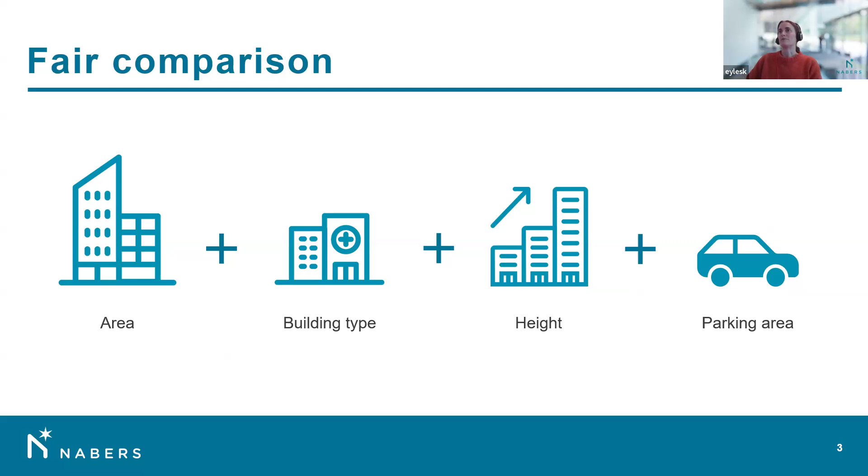We have an algorithm behind that takes into account things that affect whatever you're measuring. So if you're measuring energy use in a building, we would take into account things like area, building type, what is the use of that building, so that we can put everyone fairly on that scale, comparing apples to apples. So we certify buildings on a few things. Embodied carbon is, of course, what we are talking about today.

And to give you an idea of how widely spread NABERS is, these are just a few snippets from our website of active ratings. Operational energy ratings are mandated for buildings over 1,000 square metres when they're sold or leased, so we tend to have a lot of active ratings around Australia.

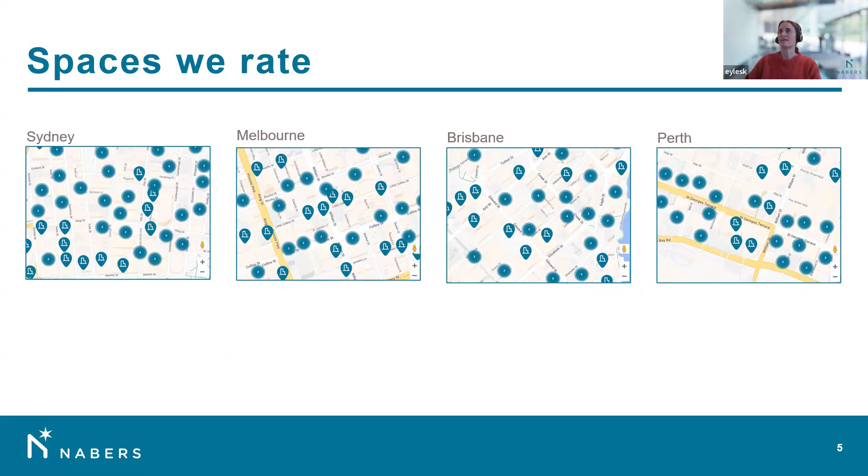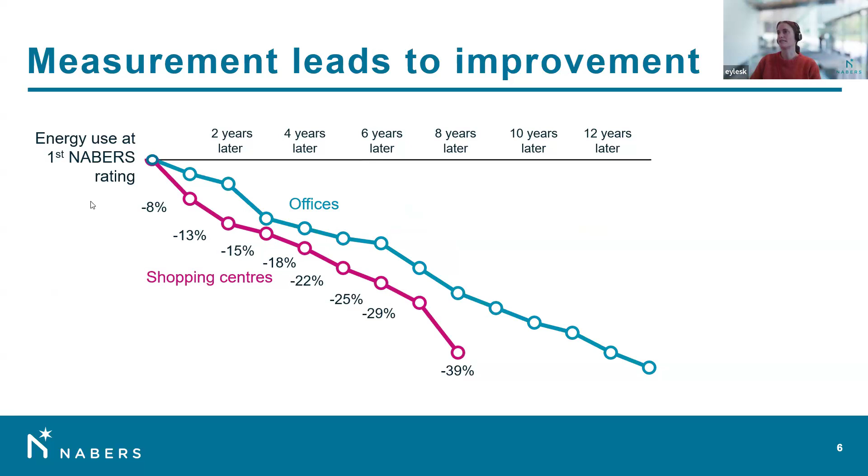And probably the main thing that we like to talk about with NABERS is, I'm sure you all know this, measurement leads to improvement. So for example, with office operational energy ratings, we've found that over 10 years, buildings are using close to 40% less energy, and shopping centres moved even faster. So hopefully with embodied carbon, we can do the same sort of thing.

In terms of the embodied carbon tool itself, we started working on that a few years ago in 2021. The first thing we did was spend a couple of years talking with pretty much everyone who's involved in creating buildings. So everyone from developers to architects and engineers, policymakers, and building product manufacturers. What we were doing was understanding, well, if we're going to create an embodied carbon measurement method, what do we need to take into account?

So for example, how much of the building are we measuring? Are we trying to measure everything down to the nuts and bolts, or are we focused on the materials that make a bigger impact, like your concrete and your steel, the structural elements? Are we trying to measure whole of life, right through to when the building is eventually demolished, or are we measuring upfront carbon just until people are starting to use the building?

What emission factors should we be using for materials? All these kinds of things we discussed with everyone to agree together as an industry what the right way to go was. So that's why it's been kind of a long road to get to this point. But the tool is out now, and essentially what the embodied carbon tool is, is these 5 things.

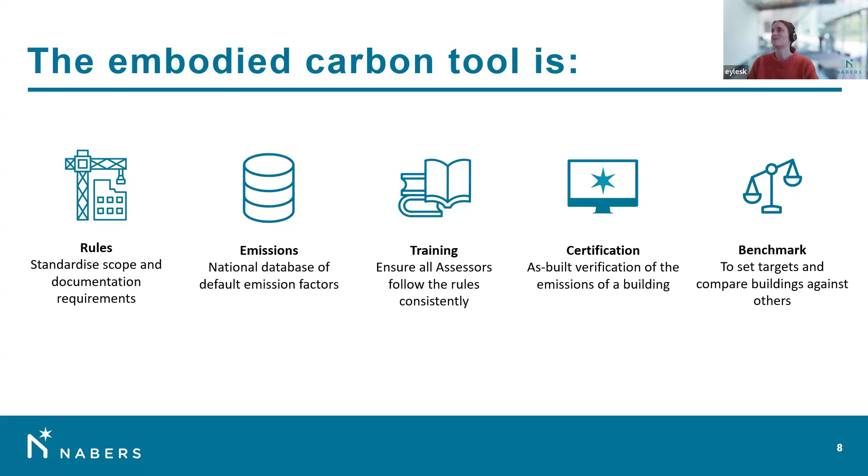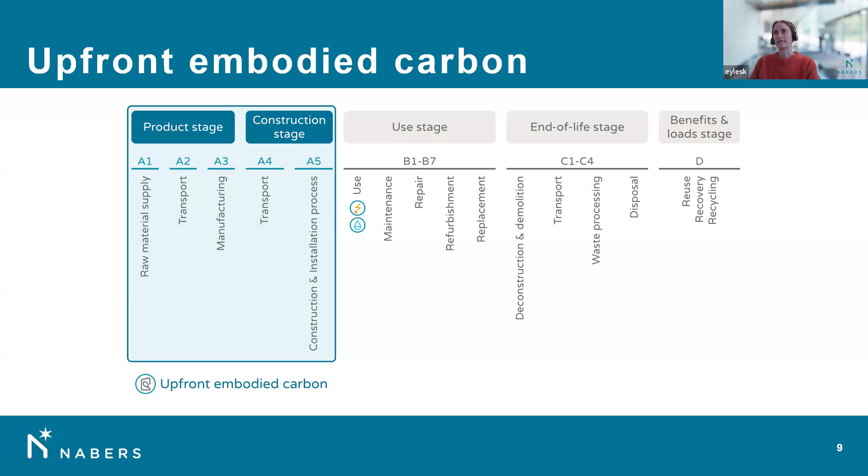If we're talking about measuring embodied carbon, what are we actually measuring in terms of the building's life cycle? We're focused on upfront embodied carbon. So everything from raw material supply to when the construction process is complete. The reason we focused on upfront embodied carbon, there's a few reasons. It is the biggest part of the picture in terms of emissions.

So a paper that ASBEC recently published showed that around 65 to 75% of all embodied carbon in a building is that upfront picture. And we need urgent action right now, of course, to reduce emissions as quickly as we can. Once the building is built, we know what's gone into it. We can easily measure that.

And we get questions, of course, about whole of life carbon because it's important to balance what you're doing now with the rest of the life of the building, how often you need to replace things or how energy efficient it's going to be, all those kinds of things that you would know to focus on in your day-to-day work. But if we were to try and measure whole of life carbon, we'd be making a bunch of assumptions about the future, which are pretty likely to be incorrect.

So we want to make decisions today that are informed by whole of life considerations, but we don't want to rate the whole of life picture because we don't want to trade off higher emissions now for things that may or may not happen in the future. So really focused on upfront embodied carbon to make that urgent action happen in reducing emissions.

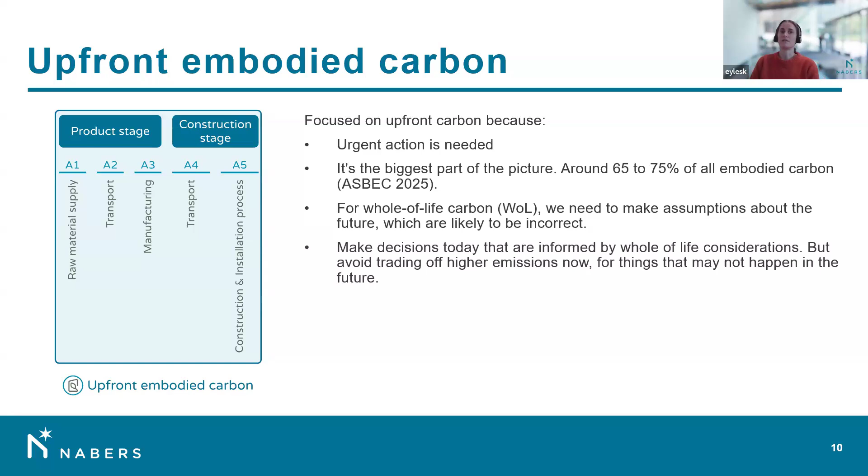But we do provide a whole of life calculator as well that you can play around with to help you understand the whole of life picture. It's just we don't certify that. We only certify upfront. In terms of measuring upfront carbon, it's kind of simple in a way, just the quantity of each material times the emissions of that material, and then adding on transport emissions, construction energy, and then emissions from the waste that occurs during construction.

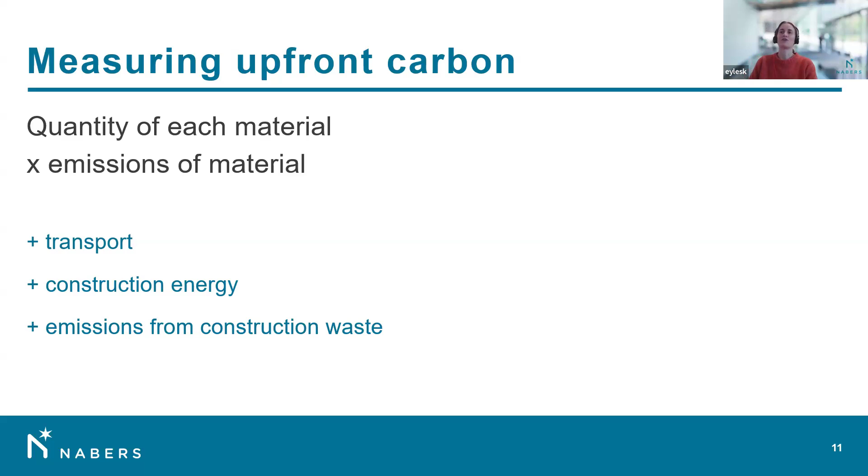Let's take a look at what each of those things mean. So if we're talking about measuring the materials in the building, what is the scope of that? We're focused on the main structure of the building. So substructure, superstructure, envelope, some of the bigger internal items like floors that tend to make a reasonable impact of at least 1% or 2% in the overall picture. But we're not going down to measuring details such as fixtures and fittings and fit out materials.

There's a couple of reasons for that. It would be quite hard or time intensive to measure absolutely everything in the building, and also to get good quality data for everything in the building. Once we have measured the main structure, we're already measuring about 90% of the emissions associated with a building. So it's more practical to focus on the bigger ticket items.

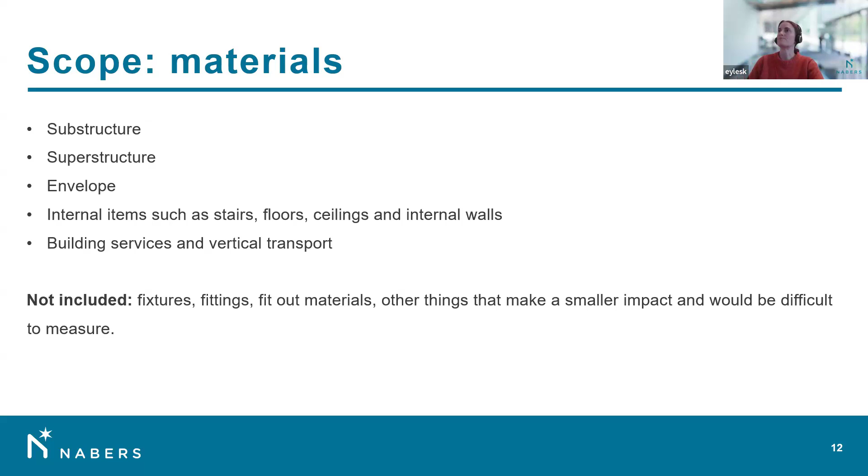And also focusing on the main structure helps us make it a fair rating because when a new building is built, whoever's doing the fit out might be different from who's building the base building. So it's easier to make sure we're consistent and that everyone's measuring the same thing and that it's a fair system as well. So to give you an idea what that looks like, we have in the rules a list of all of the materials that need to be measured.

And they're also a smaller percentage of overall emissions for those building types. So really just the goal is to make it consistent for everyone so that everyone can measure the same thing and we're measuring what's in control of the developer.

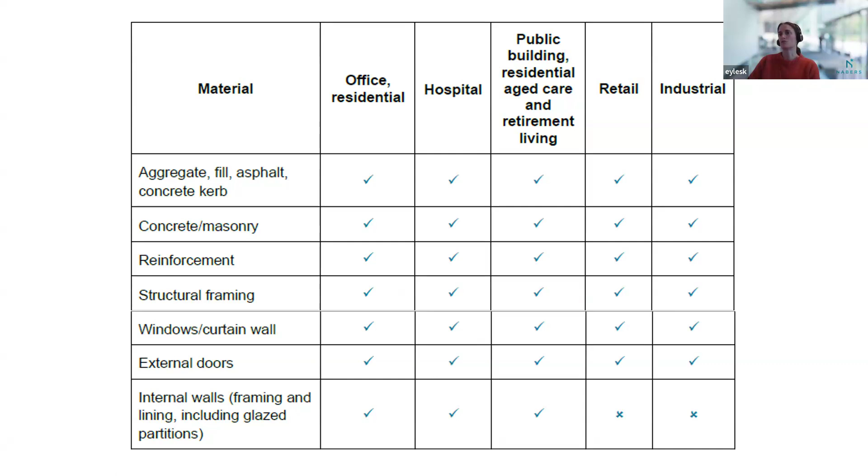So then, once you know what materials you need to measure, what evidence do we require of what was actually put into the building? This part is really important. We need as-built evidence, so things like delivery dockets or returnable schedules or receipts or other evidence of what was actually delivered to site. This is really important because we know that at the moment that information is often not being collected as the building is being built.

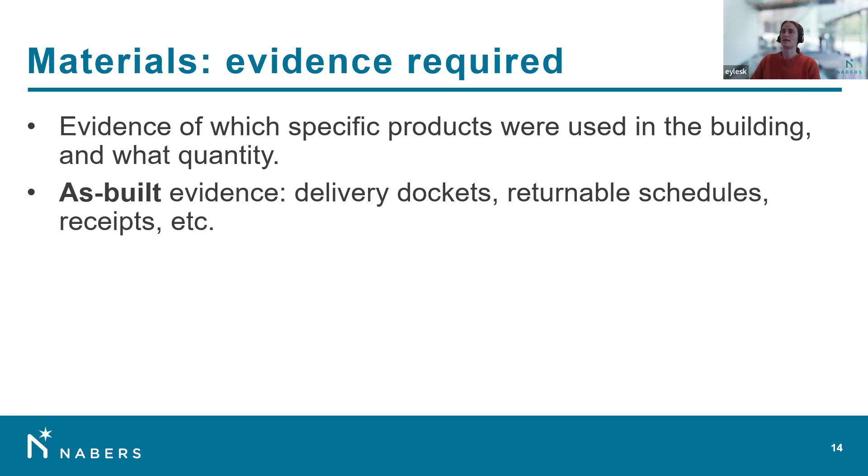So that is quite a big deal at the moment, how we can get processes to change so that people are collecting that evidence during the construction process. Really hard to get it later once construction has been completed. And the reason why we require as-built evidence, not for every material, but for the major materials, is because we know that what's planned isn't necessarily what's actually delivered. So we don't want to be rating things incorrectly, basically.

So then for your materials, what emission factors are you applying to the materials in the building? There's a few different methods of measuring emissions, different LCA life cycle methodologies. So there's process-based, which is looking at your specific product and everything from getting the raw materials to when that material is finished being manufactured. What are the emissions associated with that specific process?

Process-based measurement is great in the sense that you can differentiate between my timber product and your timber product. And there are also international standards that guide the scope of measurement so that everyone's measuring the same things, which makes it comparable. Then we have kind of the opposite end of the scale, input-output measurement, which is a top-down approach that uses economic data to estimate emissions per economic sector. So the input-output method is not useful for looking at the emissions associated with a building specifically because you can't differentiate between products.

Then we have hybrid, which seeks to get the best of both worlds between process-based and input-output. So it's mainly similar to the process-based method, looking at your specific material, but also includes some things that aren't included in the process-based method. So, for example, it might take into account the development of the machinery that you use to create a product, or other things that aren't included in the process-based method.

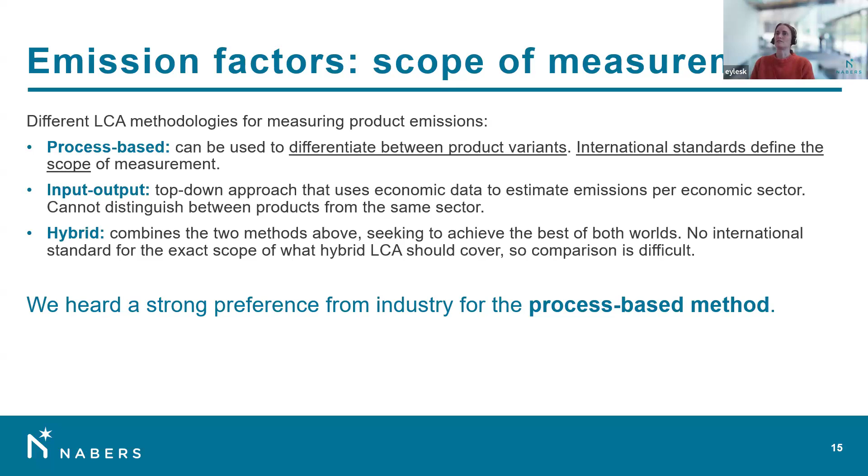And hybrid, probably some of you are pretty familiar with using hybrid data because you might have been using the EPIC database, which a lot of people have been using over the last few years. The concern with hybrid is that there isn't an international standard for exactly what scope you're measuring, which means that hybrid data isn't really comparable. So therefore, we heard a strong preference from industry for using the process-based method and not databases like the EPIC database.

So if we're looking at process-based emission factors, here's what we're talking about. Environmental product declarations, EPDs, carbon footprints, which are compliant with the same standards or measuring the same scope as in an EPD, or Climate Active product certification. And if your product doesn't have one of those measurements, then you can use the NABERS default emission factors, which have been created using process-based data.

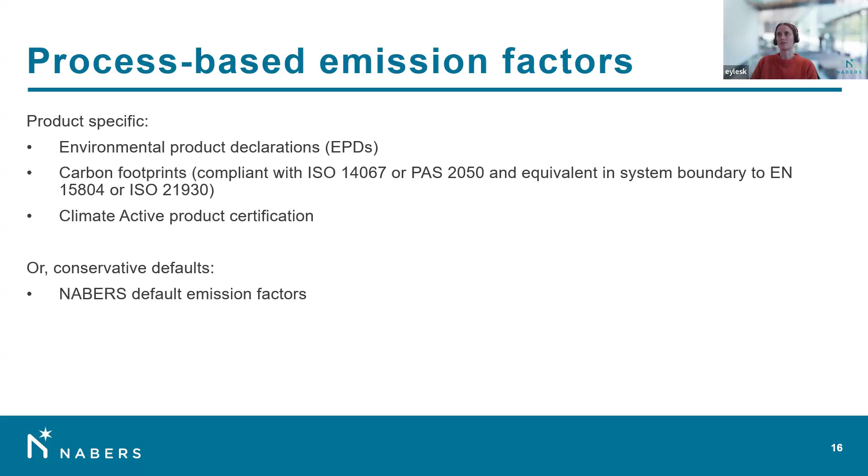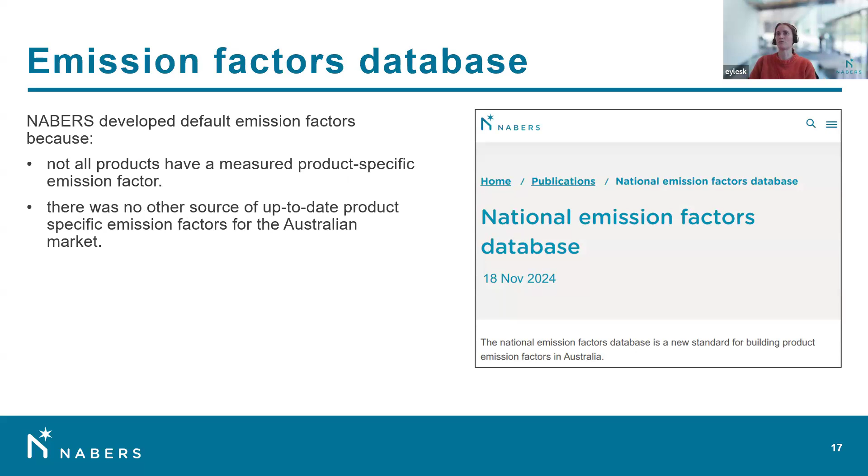So we developed the emission factors database because, of course, not all products have a measured emission factor at the moment, and there wasn't any other source in Australia of product-specific emission factors for Australian products that were up to date and that covered everything we needed to cover. So we realized, okay, we need to create one. So I'll talk a little bit about how we developed that emission factors database. The first thing we did was collect all of the EPDs and other process-based emissions data that we could find for products available in Australia.

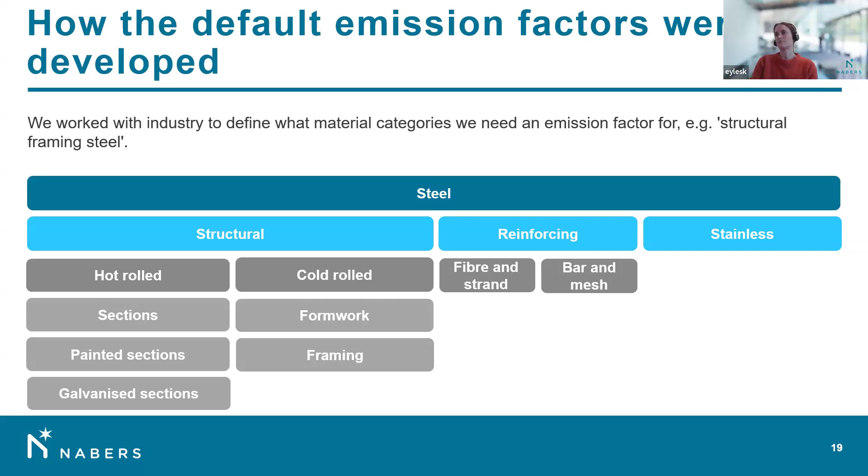And really what we were looking at is what is an appropriate grouping of things that are manufactured in a similar way, so that the emissions are reasonably similar, and things that are used for a similar purpose in a building. So that was the level that we needed to go down to for the different levels of steel. So for example, in structural, galvanized sections needs its own emission factor.

So we had all of the emission factors data. We had what types of materials needed their own default emission factor, and then we held industry workshops with manufacturers, LCA professionals, quantity surveyors, anyone else who knows about emission factors and was interested, to make sure that we had all the data to figure out what is an appropriate methodology for creating default emission factors, and also to cross-check against other sources.

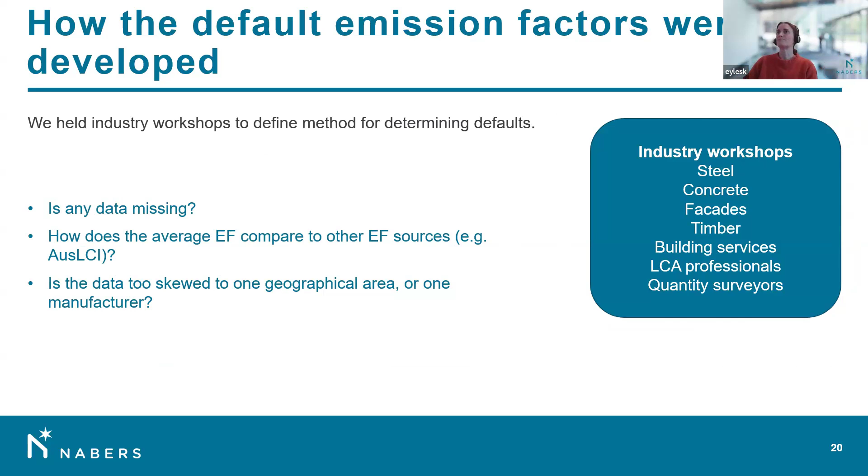So for example, if we look at the data that we've collected, how does that compare with other sources such as AusLCI? And importantly, checking if the data was too skewed to one specific area in Australia or one manufacturer. So once we went through that whole process, we came up with a method for developing the defaults. This is just a snippet from the database, and I'll just talk through what it means.

So for each of the product types that we need a default emission factor for, we have the maximum in category, that's the maximum emission factor that we found in any EPD. We have the minimum, that's the minimum that we found in any EPD, and then the average, pretty self-explanatory. Then we have a data qualitative rating. So we have tiers 1, 2, 3, and 4.

There's just 4 tiers. But essentially what this means is how much information were we able to find for that product. So for example, if there's a bunch of EPDs out there and a lot of companies are reporting data, we have good market coverage in terms of manufacturers and also locations around the country. That's a tier 1. Our data's pretty good quality. Once we get down to tier 4, that means that we don't have too much information. Maybe we were only able to find 1 or 2 EPDs. That's a more problematic area.

We use those tiers to make an uncertainty adjustment. So you can see for tier 1, we're just adding 2% uncertainty, whereas by the time we get to tier 4, because our data is not good, we're adding 20%. So the methodology that we are using is we take the maximum emission factor that we found in any EPD, and then we add on that uncertainty factor. So for 10 MPa to 20 MPa, we're just adding on 2% to that maximum that we found.

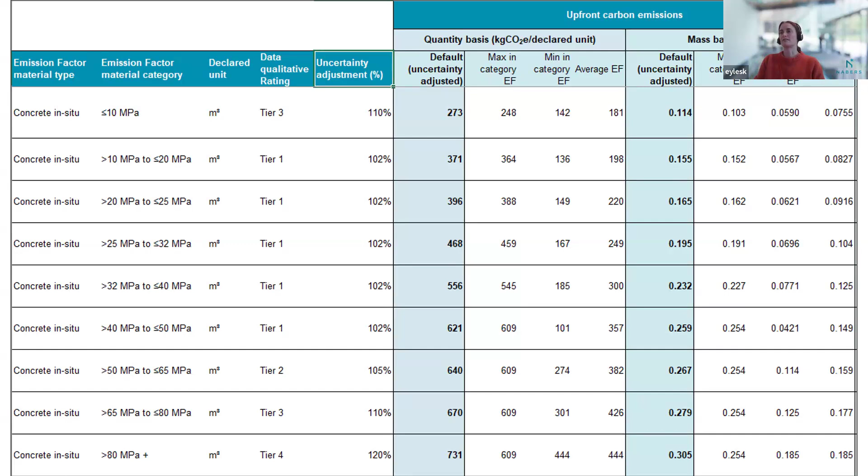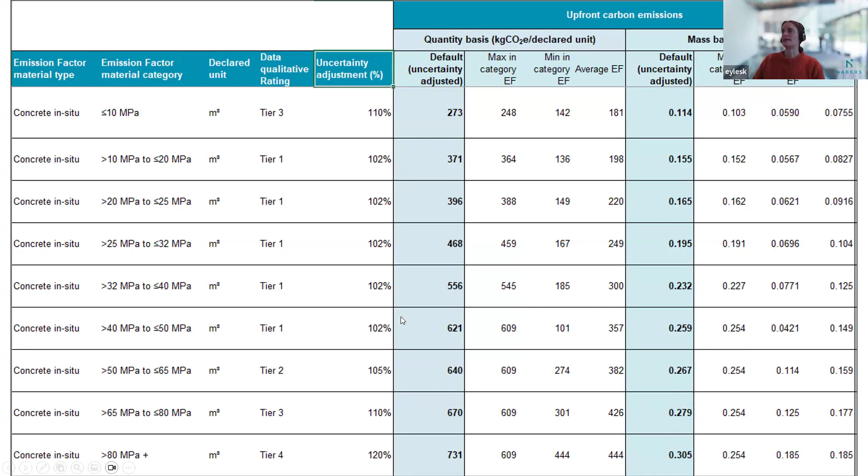We don't want the default emission factors to be better than what you might get in an EPD. And mostly the issue is that if you don't have measured emissions, we just don't know. We know that products that do have EPDs tend to be better performing than ones that don't, because those products, they're actually measuring and improving. So yeah, they are conservative in that way. But feel free to ask questions about this later. We do get a lot of questions about the methodology.

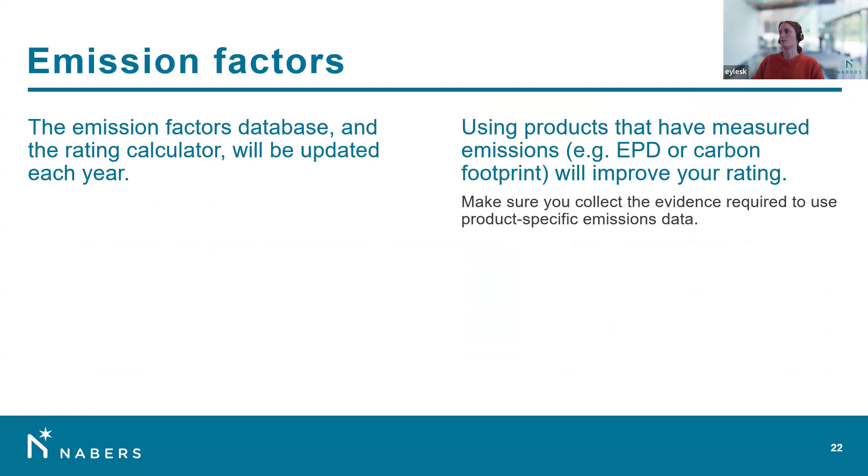That database and the rating calculator are updated each year to make sure they're up to date. But yeah, definitely better to find products that have measured emissions, such as with an EPD, because you will, of course, get a much better result because you're using known measurements. So that's kind of A1 to A3 sorted, the emissions associated with your products.

Now let's talk about A4 and A5 quickly. So yeah, transport, waste, and construction energy. Emissions for those, we have methods of modeling in the rating calculator. So if you don't have any information about those things, then you just use the defaults that are modeled by us. And if you're curious about how they're modeled, the calculator has a lot of different tabs in it that kind of explain where all of the data is coming from and how we've calculated it. So yeah, if you're curious about that sort of stuff, feel free to download all the explanations from our website.

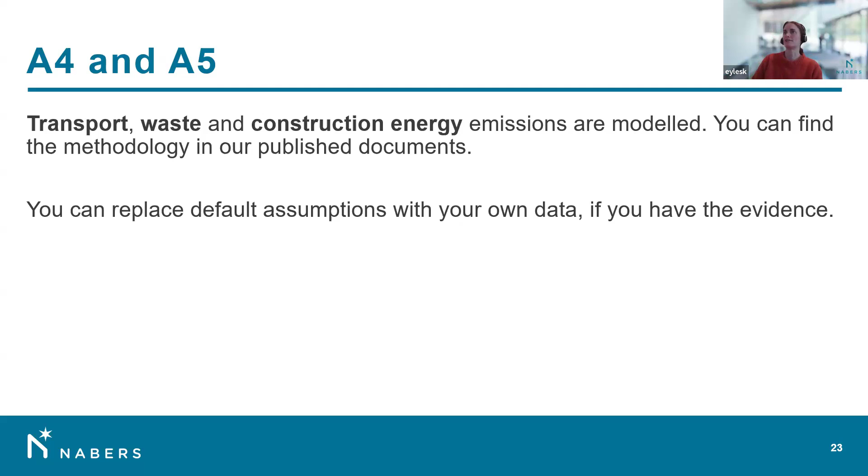But if you do have information about transport, waste and construction energy, you can replace our default assumptions with your own data if you have it. That's pretty much the tool in terms of what we're measuring. I think it's important just to note we have a lot of national agreement on the tool. So it was developed in partnership with the GBCA and industry. It's aligned with international standards for measuring embodied carbon in buildings. And we've been working closely with infrastructure and transport as well to make sure that we're doing things in consistent ways.

And yeah, it's in policy in a few places, so this wouldn't apply to you guys, but for New South Wales, our Sustainable Building SEPP uses this measurement methodology for embodied carbon. There's the Federal Environmentally Sustainable Procurement Policy, and it is also written into the next update to the National Construction Code, whenever that comes out, as a voluntary pathway.

If you want to take a look or want to start using the calculator to estimate your emissions for buildings, that's all free and available to download from the NABERS website. So yeah, there's the calculator. If you go to our estimate your rating page, you can find the embodied carbon calculator there. Or if you're looking for the rules about what to measure or the emission factors database, they're all available on our embodied carbon page. We want people to use it. We want people to estimate. Totally free to estimate. The only time you would have to pay to use it is if you're actually submitting a rating to us for certification. That's about it. So yeah, I'll throw back to you guys for any questions.

Thanks, Katie. Love it. Absolutely. First things first, I guess, curious as to the iterative process of where you've got your different banded tiers of embodied carbon of concrete, for example. I know there's been some work coordinating with the Materials Embodied Carbon Leadership Alliance, and they've, I guess, come up with some efficiency bands, if you like, for different carbon intensities for different concrete mixes. And I'll get to my question in a second. But what are the current rules around claiming savings associated with different tiers or bands? Do you compare it with your default concrete mix, or is there work in progress to maybe look at an efficiency band that might be industry standard?